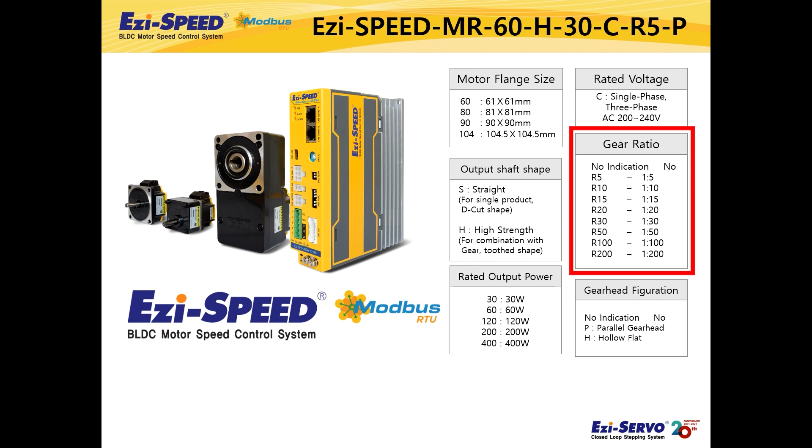The output corresponds to the motor size in ascending order. That is, a 61 mm sized motor corresponds to 30 watt, an 81 mm sized motor corresponds to 60 watt, a 90 mm sized motor corresponds to 120 watt, and a 104.5 mm sized motor corresponds to 200 watt and 400 watt. The gearbox can be selected between a parallel shaft gearbox and a hollow shaft flat type gearbox, and the gear ratio can also be selected as shown in the table.

Now, we will introduce the features of Ezi-SPEED Modbus-RTU products. Ezi-SPEED Modbus-RTU product is a BLDC motor speed control system that supports Modbus-RTU network based on RS-485 communication. The Modbus protocol has a simple structure and open specifications, so it is a network used in overall industrial fields such as logistics and manufacturing.

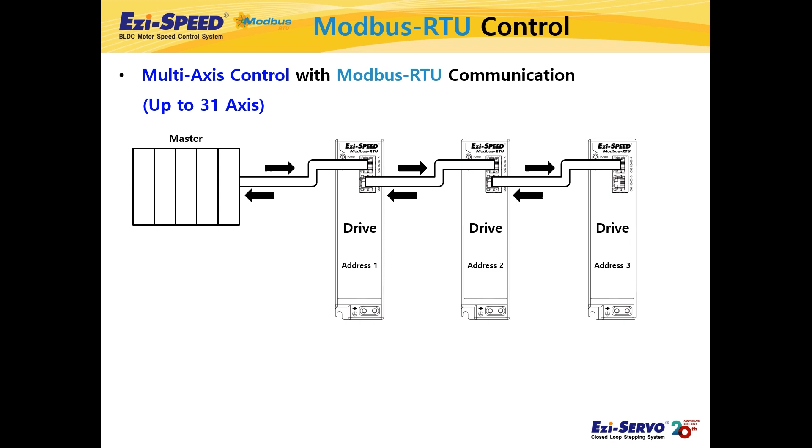Up to 31 drives can be connected to one master controller. The master controller can send commands to each drive independently, one at a time, or send commands to multiple drives simultaneously through broadcast or group commands. As an example, I will show a demo connecting two drives using the HMI as the master.

As you can see, each drive can be controlled independently from the master. Ezi-SPEED Modbus-RTU provides a group operation function, allowing you to control two drives simultaneously.

Additionally, Ezi-SPEED Modbus-RTU provides a control interface that connects Modbus-RTU network control, I/O control, and PC support software via USB. First, I/O control can be connected to an external switch or PLC through an I/O input-output cable to configure an operation system through I/O. By setting the necessary functions for input and output, the user can drive with functions such as up to 16 speed operation, emergency stop, and torque limit. It also provides the ability to set the speed using analog.

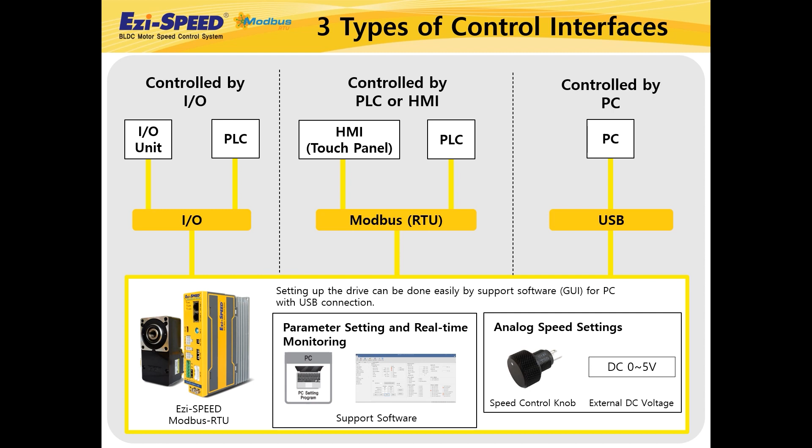Next is network control using the RS-485-based Modbus-RTU protocol. You can control the drive by connecting a master such as a PLC or HMI that supports Modbus-RTU. Up to 31 drivers can be connected to one master. Each axis can be operated separately, and multiple axes can be operated simultaneously through group control. Support software for PC is provided, allowing you to quickly and easily set various drive parameters or test operation.

Let us introduce I/O control in more detail. Ezi-SPEED Modbus-RTU supports 7 inputs and 2 outputs and can also be controlled analogously through a variable resistor or external voltage. Ezi-SPEED Modbus-RTU allows users to set various functions to 7 input and 2 output signals. It is possible to control the motor's start, stop, rotation direction change, torque limit release, and multi-speed operation.

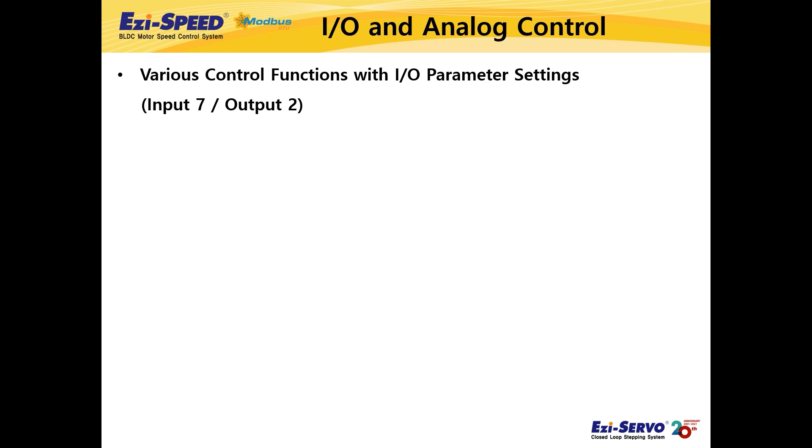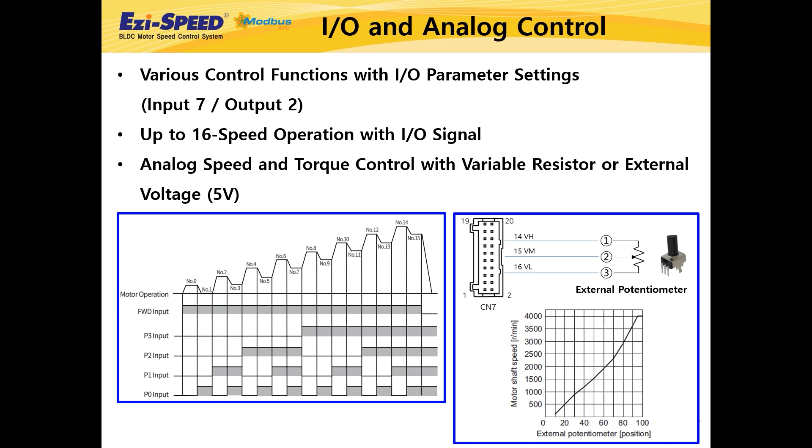It provides 16 types of operation data consisting of rotation speed, torque, acceleration time, and deceleration time, and operation at up to 16 speeds is possible. Parameters and operation data can be easily set through PC support software. Continuous analog speed control or torque control is possible through variable resistor or external voltage. Offset and maximum values can be set and precision can be adjusted through parameters.

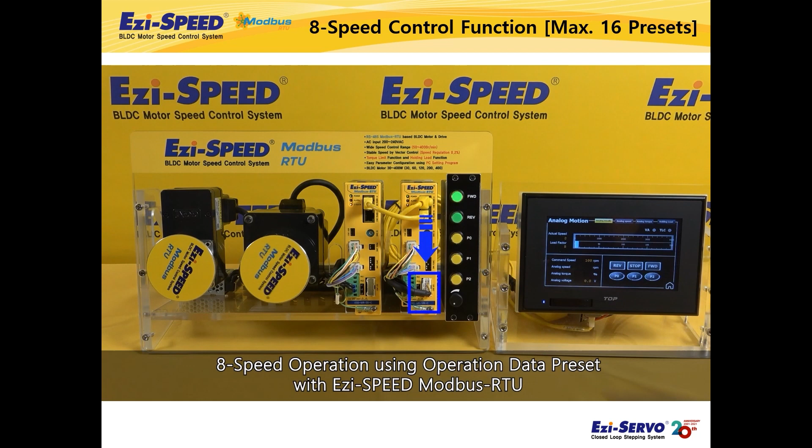As an example of the I/O control function, I will show a demo of 8-speed control using a switch as I/O. The 3 yellow switches are connected to functions P0, P1, and P2 respectively. You can select 8 operation data with on-off combination. When using up to P3, up to 16 operation data can be selected.

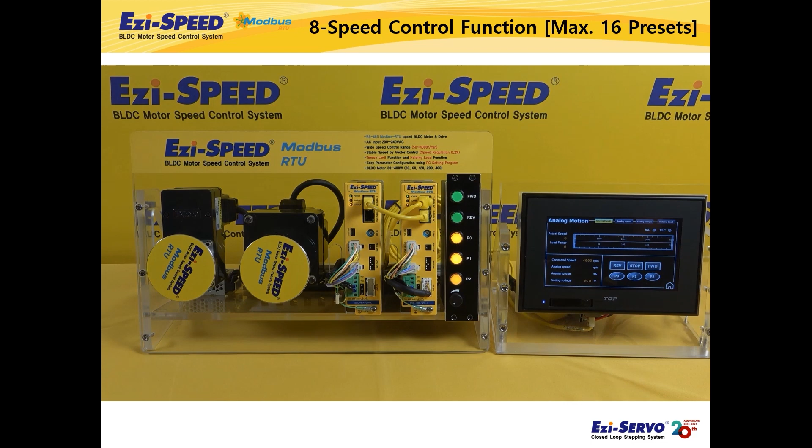The currently set operating data are 100, 500, 1000, 1500, 2000, 2500, 3000, and 4000 revolutions per minute in that order. You can also control the speed of the motor via analog input with the volume knob.

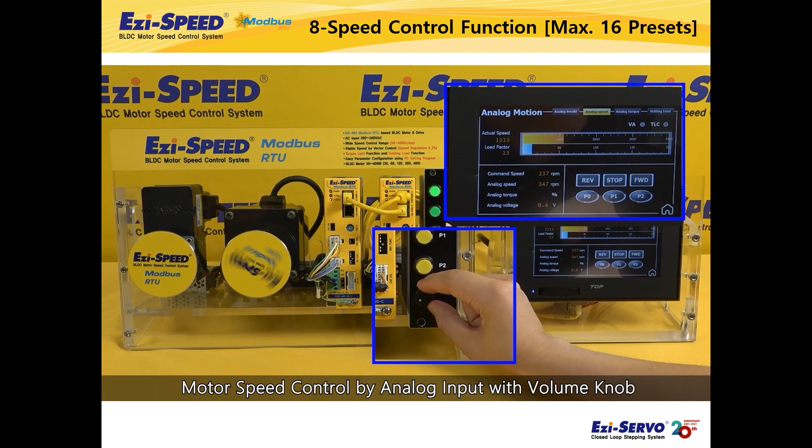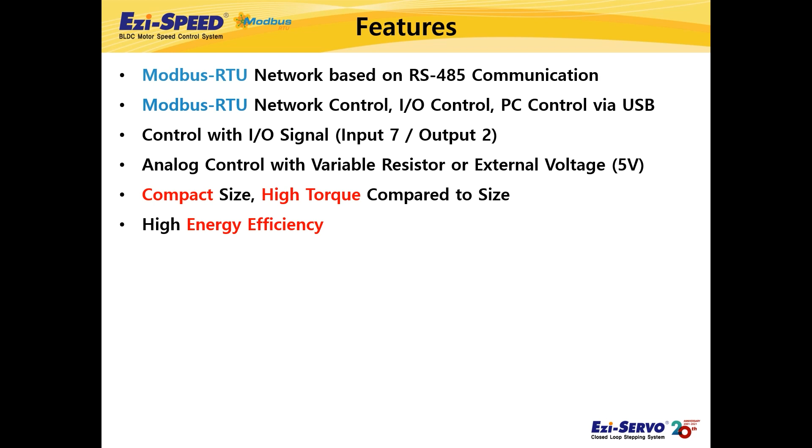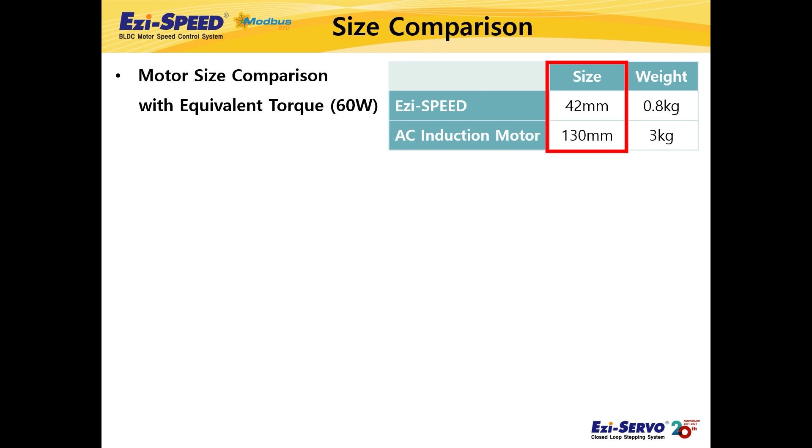An Ezi-SPEED Modbus-RTU has a compact size and high torque by adopting a small, high-efficiency brushless motor. For example, when compared with the same output, the 60-watt standard size of the Ezi-SPEED is compact at 42 mm. AC induction motors are relatively large at 130 mm. Ezi-SPEED weighs only 0.8 kg and the AC induction motor weighs 3 kg, making the Ezi-SPEED lightweight.

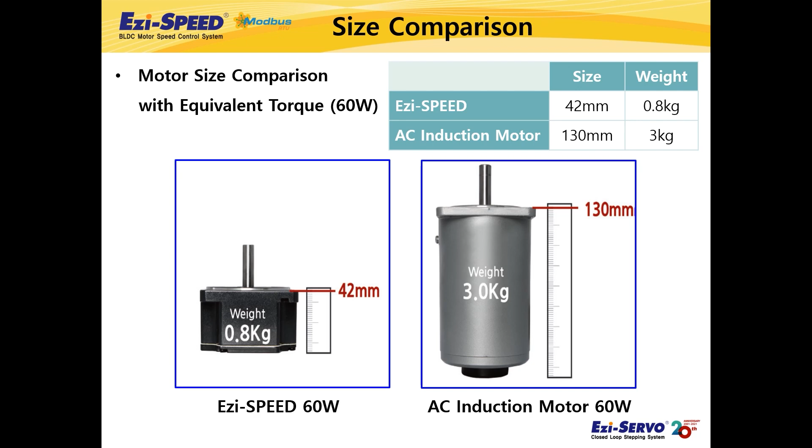And since AC induction motors often have a fan mounted behind the motor, the size difference is almost 3 times that of Ezi-SPEED motor. Therefore, using Ezi-SPEED, machine size will be much smaller. Additionally, Ezi-SPEED can produce higher torque than AC induction motors despite its compact motor size. In particular, in the case of AC induction motors, torque drops at low speeds, while Ezi-SPEED consistently produces high torque at both low and high speeds due to the characteristics of BLDC motors. I will explain it with a torque graph later on.

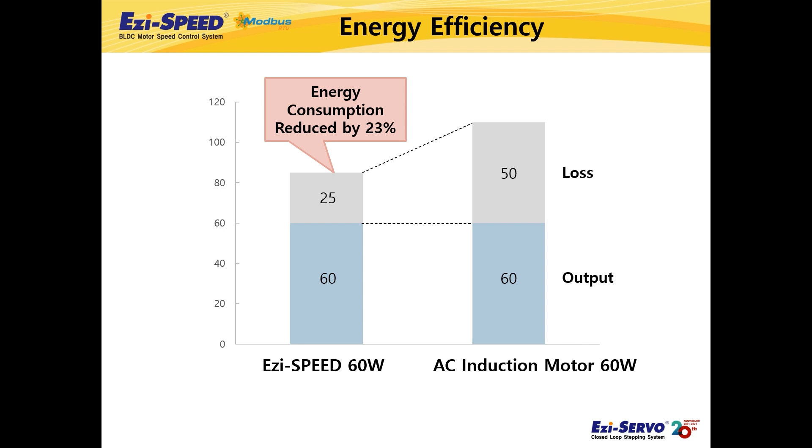Additionally, BLDC motors have high energy efficiency by using permanent magnets to suppress secondary losses in the rotor. When replacing the AC induction motor with the Ezi-SPEED series, it is possible to reduce power consumption by approximately 23%. Next, Ezi-SPEED Modbus-RTU products can control a wide range of speeds. In addition, it has high speed stability by controlling the motor with vector control technique. Let me explain it with a graph.

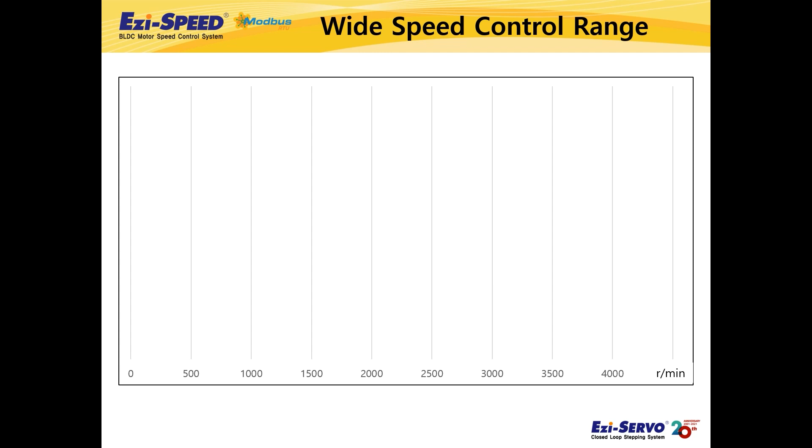Ezi-SPEED can be controlled from a minimum of 50 revolutions per minute to a maximum of 4000 revolutions per minute, and consistently produces high torque from low to high speeds. However, in the case of the combination of an AC induction motor and inverter, although there are differences depending on the manufacturer, in general, the speed can only be achieved from a minimum of 200 revolutions per minute to a maximum of 2400 revolutions per minute, making it impossible to control at high speeds like Ezi-SPEED. And the torque is reduced at the low speeds.

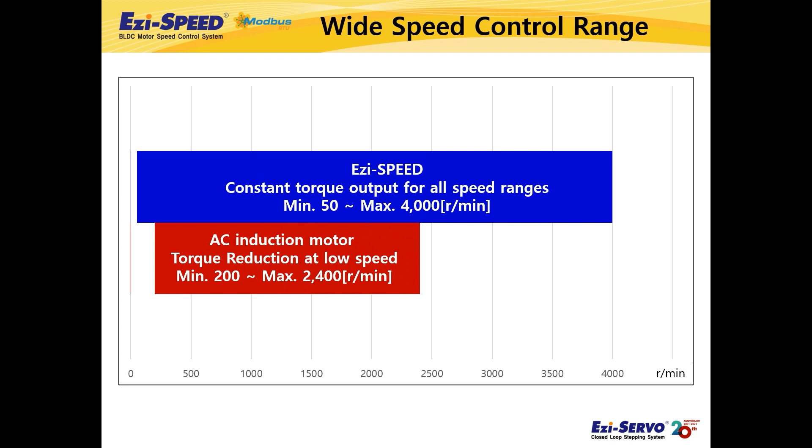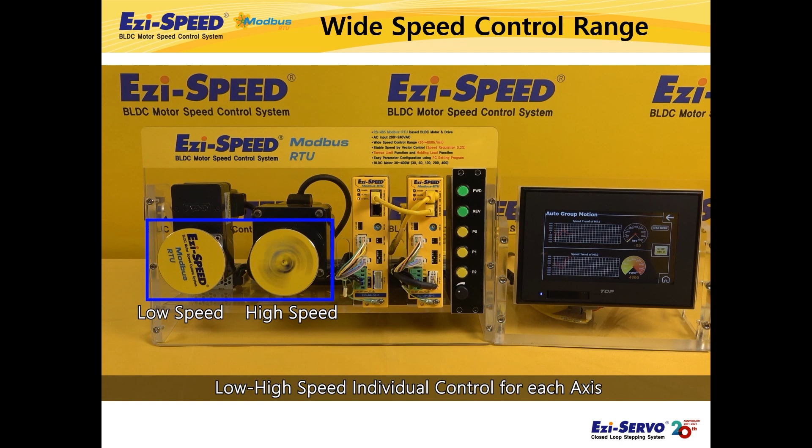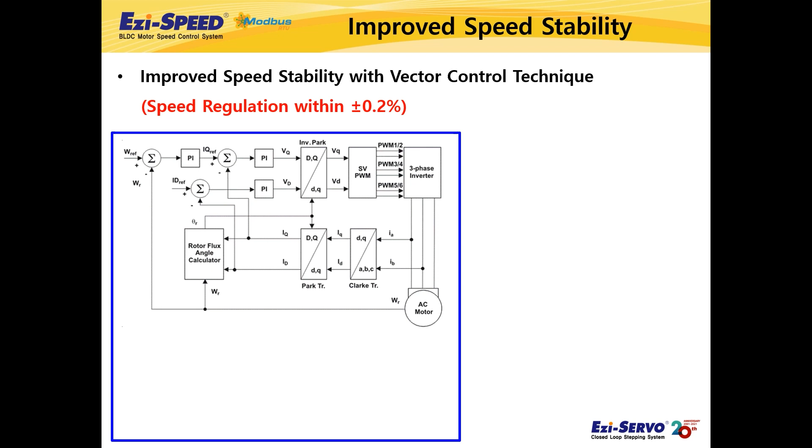Ezi-SPEED Modbus-RTU controls the motor through vector control technique to achieve high speed stability. The vector control technique is called field-oriented control and is a method of controlling the rotation of the magnetic field vector by the stator with current. Because the size and direction of the magnetic field can be precisely controlled, the motor's torque and speed stability are higher than with existing control methods. Ezi-SPEED Modbus-RTU has high speed stability with a speed fluctuation rate within 0.2%. And Ezi-SPEED Modbus-RTU provides torque limit function and load holding function. We will briefly explain each function in the next chapter.

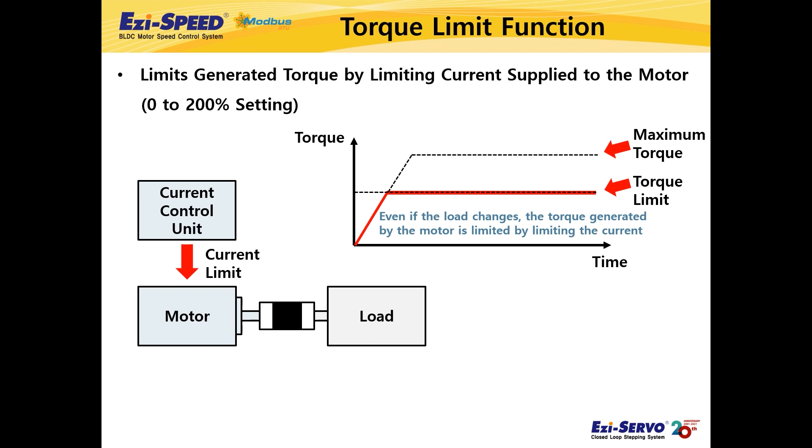First is the torque limit function. This function suppresses the torque generated by the motor so that it does not exceed the value desired by the user by limiting the current flowing through the motor. The setting value of 100% is the rated torque, and the torque limit can be set from 0 to 200%. This prevents applying more force than necessary. For example, you can set the torque limit slightly higher than the torque required for the applied load to prevent operator injury from excessive motor torque. This function can be applied to AGVs, conveyors, agitators, etc. where speed control systems are used.

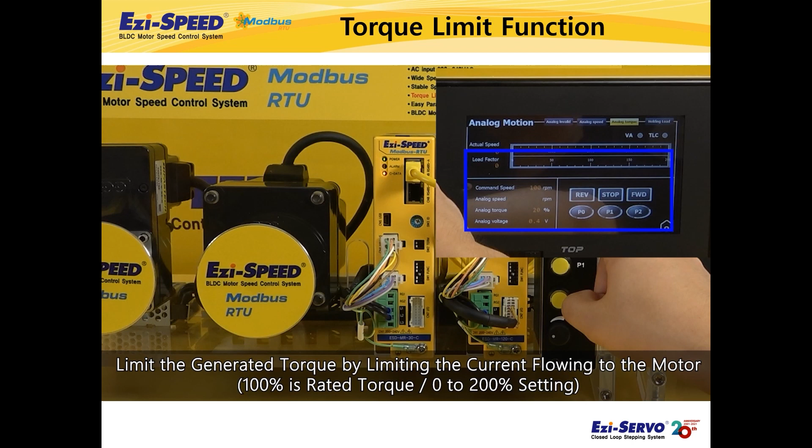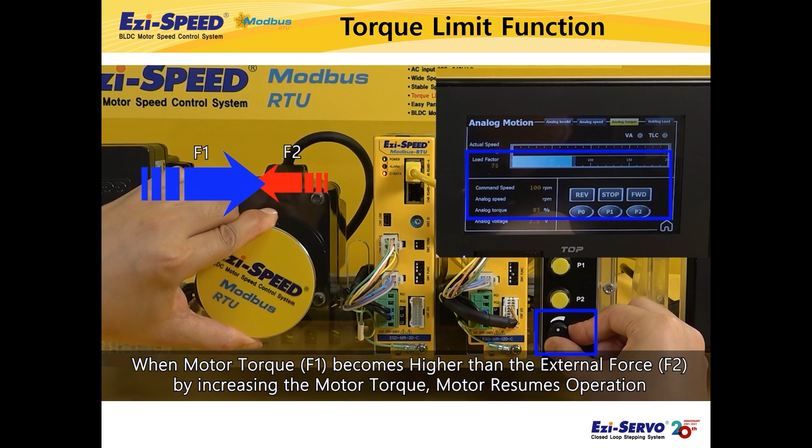The torque limit function can also be set using analog input. We will demonstrate how to adjust the torque limit value using the volume knob. The torque limit function is a function that limits the current flowing in the motor to prevent the motor torque from exceeding the torque limit value. Therefore, if an external force exceeding the torque limit value is applied, the motor torque cannot exceed this and the motor cannot operate. At this time, if the torque limit value is higher than the external force, the motor torque exceeds the external force and the motor runs again.

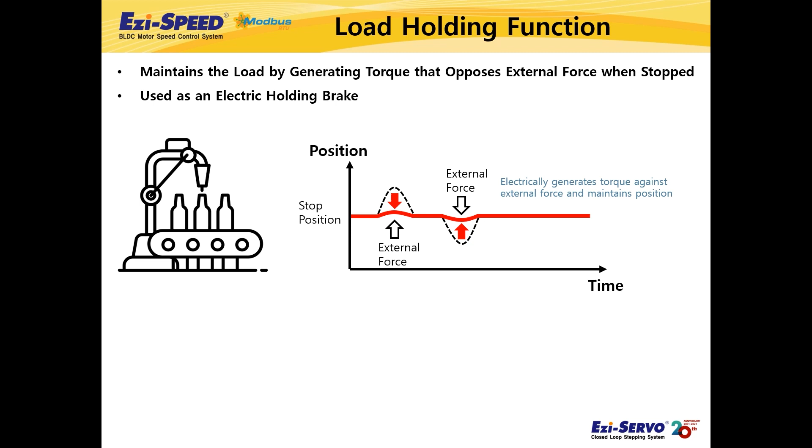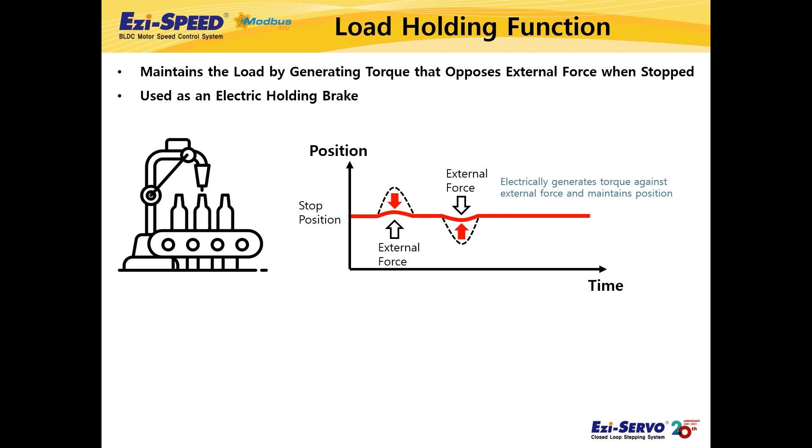Next is the load holding function. This function maintains the current position through an appropriate force even when stopped. When an external force is applied when stopped, the position is maintained by generating an appropriate torque. It can be used as an electric holding brake when the motor is at standstill, even without a mechanical brake. For example, when working on a belt while the conveyor is stopped frequently, the load holding function can be used to prevent the workpieces from shaking.

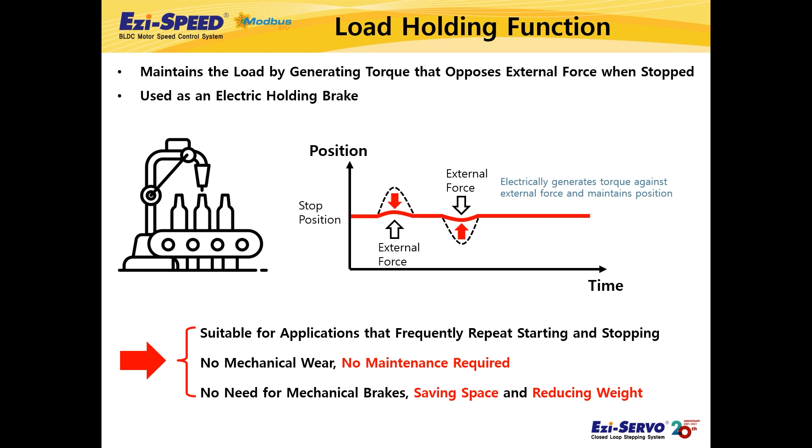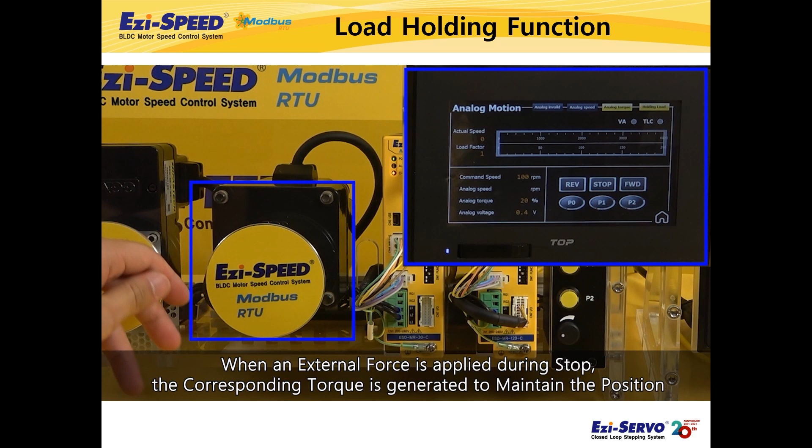Unlike mechanical brakes, maintenance is not required as there are no mechanical wear parts, and space is saved and weight is reduced. Next, we will demonstrate the load holding feature with the demo kit. When an external force is applied to a standstill motor, you can see that the motor maintains its position by generating opposing torque. It can act as an electrical holding brake without a mechanical brake.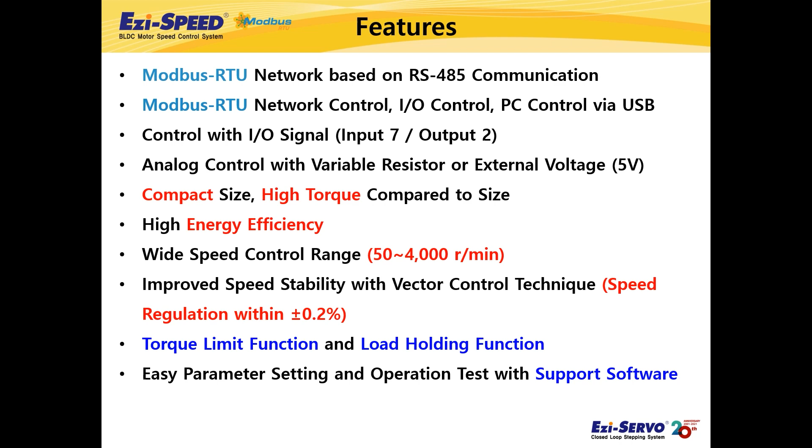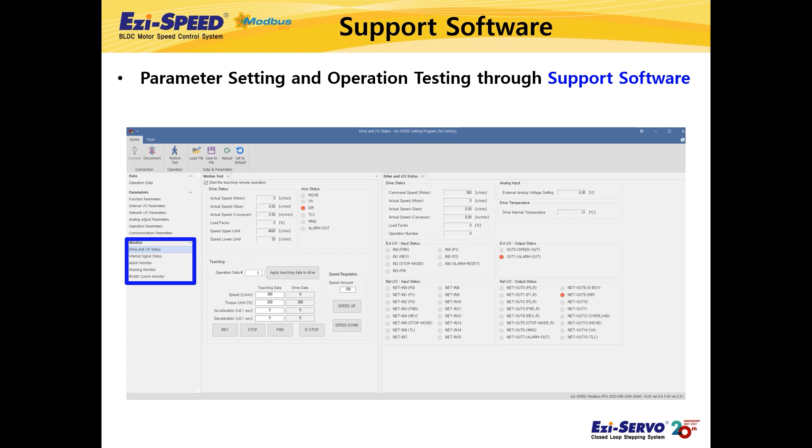Lastly, you can easily set product parameters and test operation with the support software provided by FASTECH. The drive and PC can be simply connected via USB port. The support software provided by FASTECH supports various functions. There are parameter setting function, monitor function, and operation test function. We will explain each function with a demo kit.

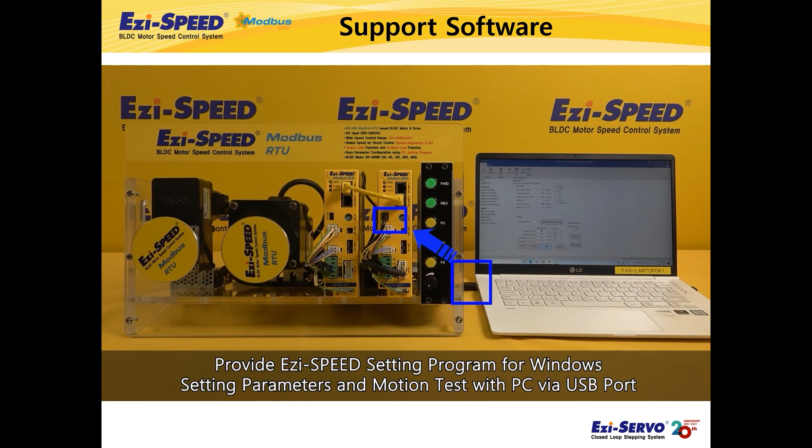As you can see, you can connect the drive's USB port to your PC using a USB 2.0 mini Type B cable. With the support software, you can easily set all parameters. Additionally, the monitor function allows you to check the internal status of the drive and motor, alarms, and other status at a glance. Lastly, the motion test function allows you to easily test whether the motor and drive are operating normally.

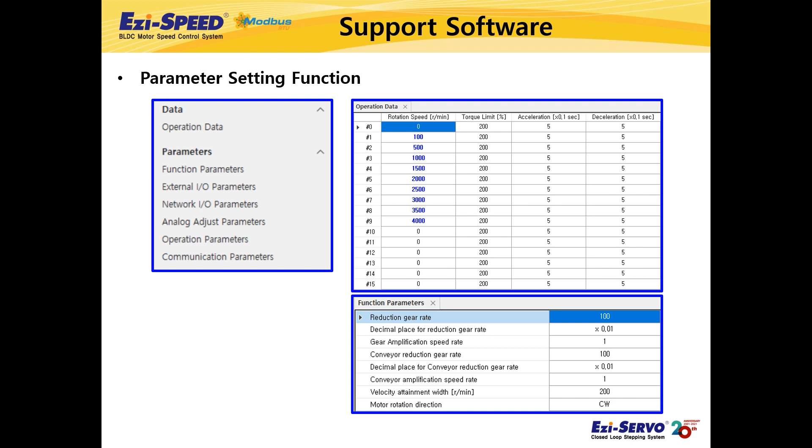First, with the parameter setting function, you can easily modify and save parameters for motor operation or various functions. In addition to 16 operation data including rotation speed, torque limit, acceleration time, and deceleration time, all parameters can be set easily and quickly with the support software. The set values can be saved as a parameter file so that the settings can be quickly copied to multiple drives. The following shows an example of setting operation data in the support software.

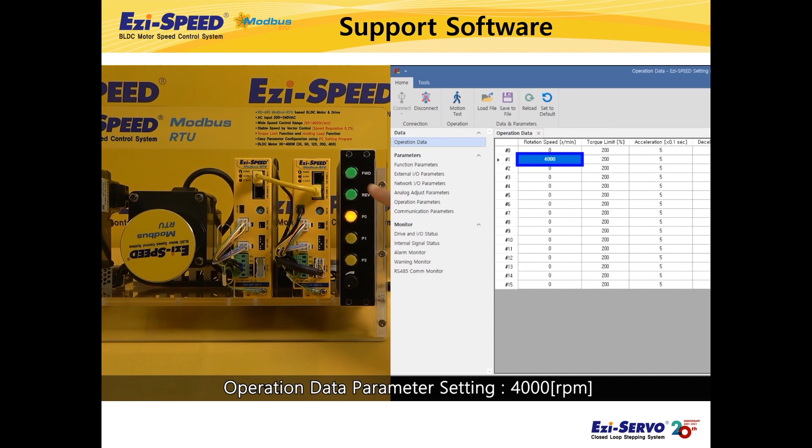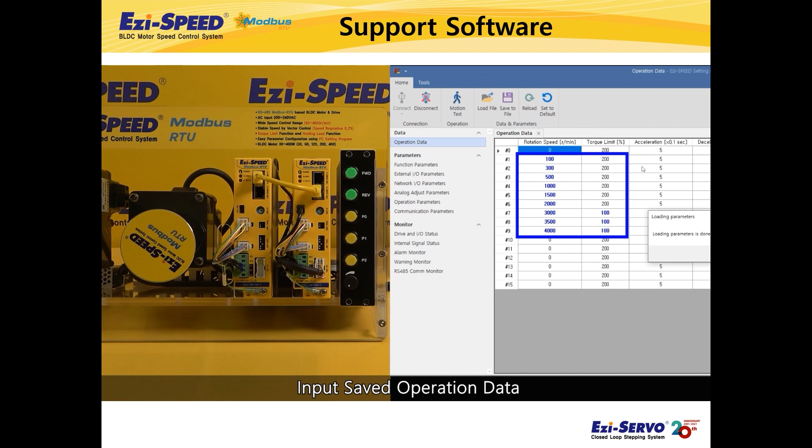You can also load saved parameter files and set operating data at once. All parameters can be modified in the support software, including function setting parameters, external I/O parameters, network I/O parameters, analog adjustment parameters, operation setting parameters, and communication parameters.

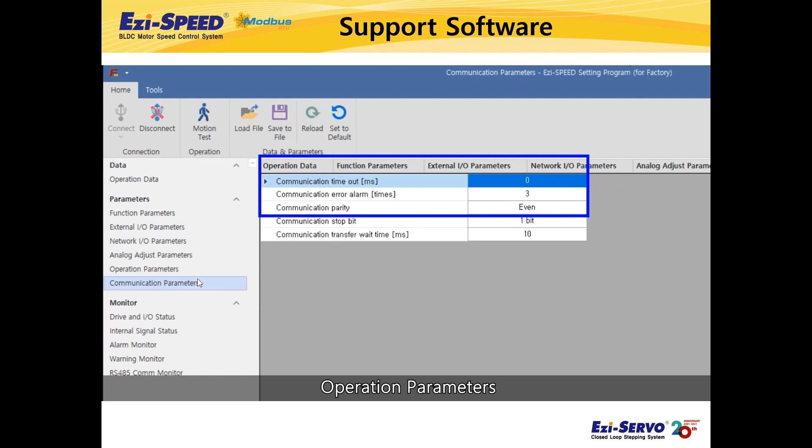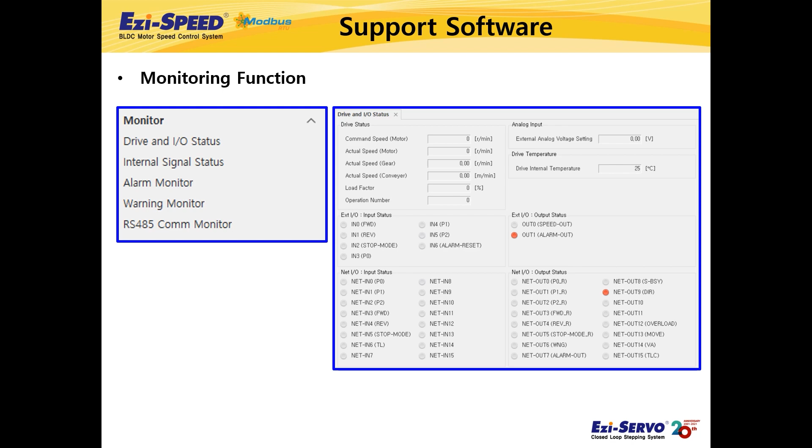Additionally, the monitor function allows you to monitor the status of drives, motors, and external I/O in real time. You can easily check the current rotation speed, load rate, input signal, alarm history, etc. The following is an example of the monitoring function during I/O control. As you can see, you can monitor command speed, actual speed, load rate, etc. in real time.

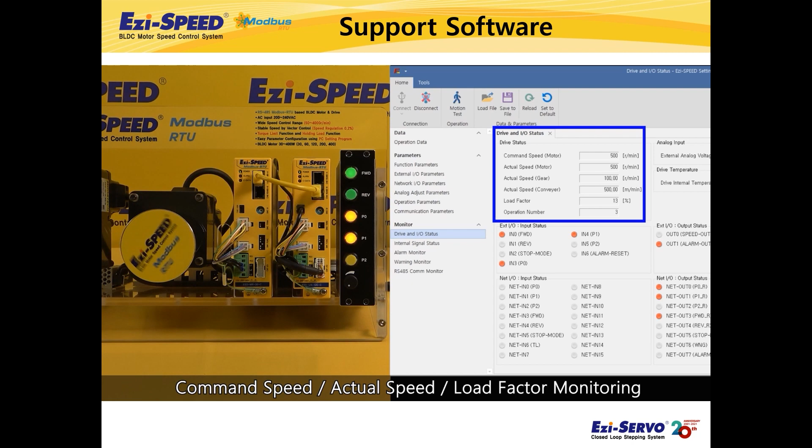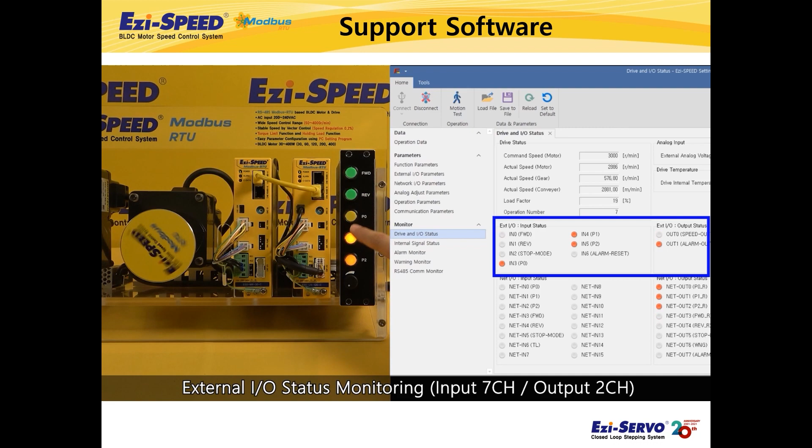Additionally, the status of I/O switches can also be monitored on a PC in real time. Also, you can monitor alarms, warnings, and communication errors, and check alarm records along with causes and actions.

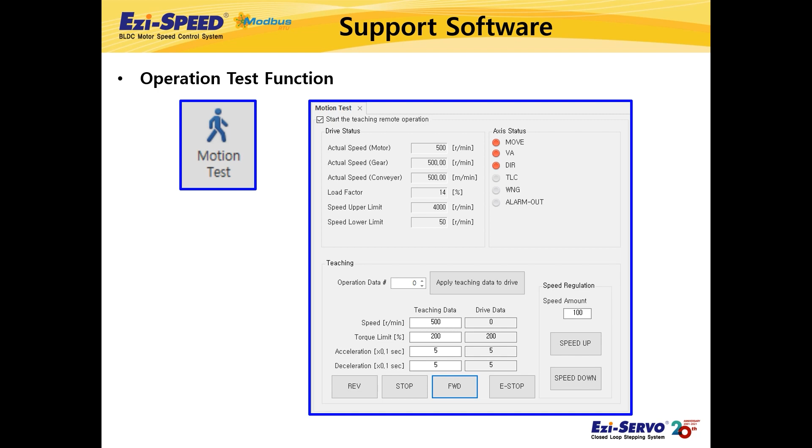Additionally, it provides a motion test function so you can simply drive the motor. It also provides a teaching function that applies motion data to operation data, so you can test it and set the operation data right away. We will demonstrate the motion test function of the support software by controlling a motor. The motion test function allows you to check whether the motor operates normally through a PC without a separate external I/O device or network master. As you can see, motor operation tests such as speed control, direction change, and sudden stop are possible.

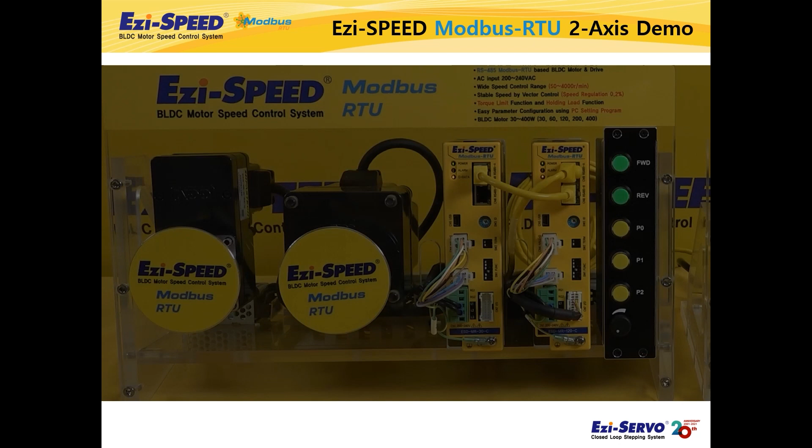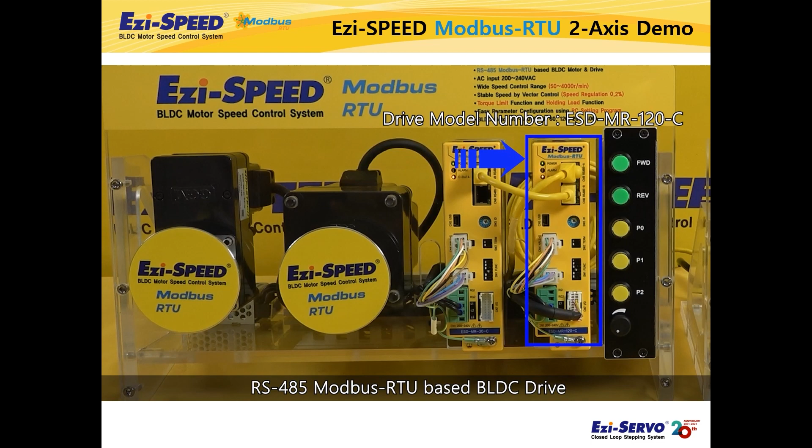Lastly, we will show a demo kit of the Ezi-SPEED Modbus-RTU product. The products and specifications used are as follows. A BLDC speed control drive based on RS-485 Modbus-RTU was used, and these are the drives for 30 Watt and 120 Watt, respectively. Additionally, the motors corresponding to each drive have a hollow shaft flat gearbox and a parallel shaft gearbox.

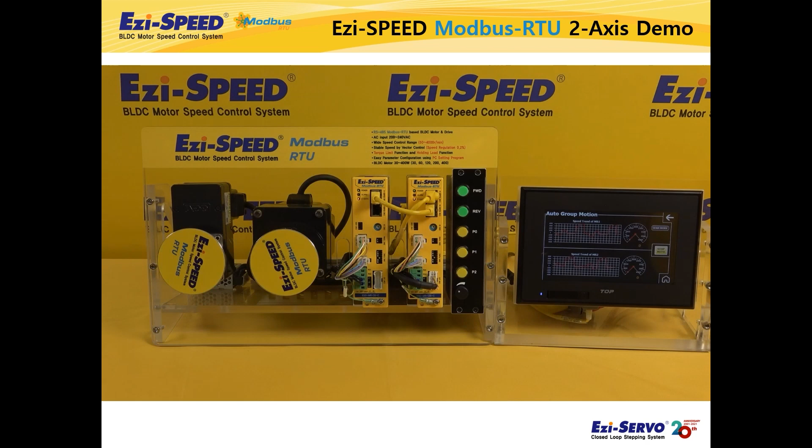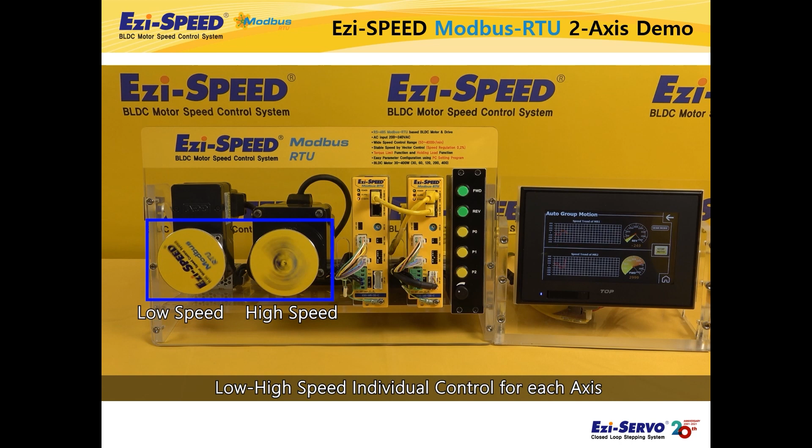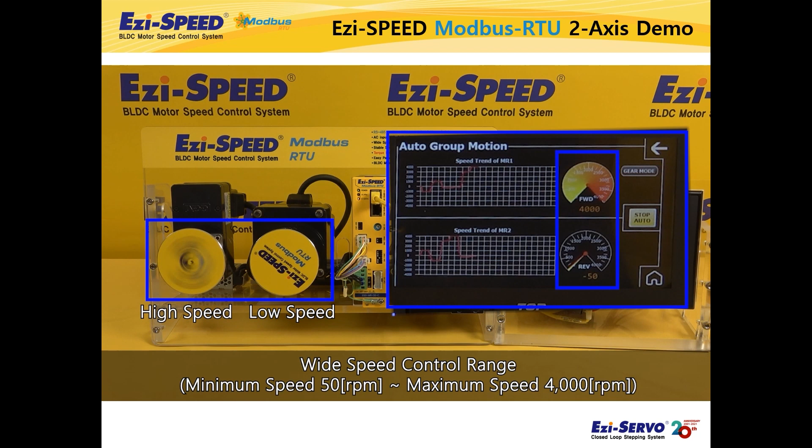The HMI and 2 drives are connected via daisy chain RS-485 cable, and up to 31 drives can be connected and used. Using HMI as a Modbus-RTU master, you can control multiple axes drives through network communication. Additionally, the motor used is a BLDC motor and can be controlled over a wide speed range from a minimum speed of 50 revolutions per minute to a maximum speed of 4,000 revolutions per minute. 2 connected motors can be controlled independently through network communication, or they can be controlled simultaneously by setting up a group.

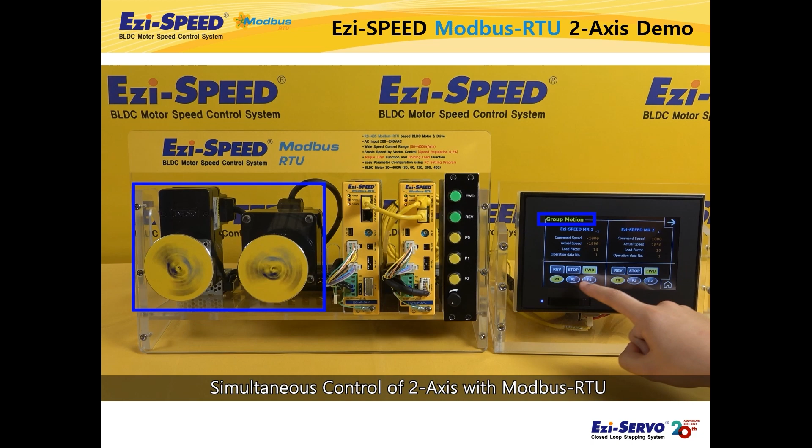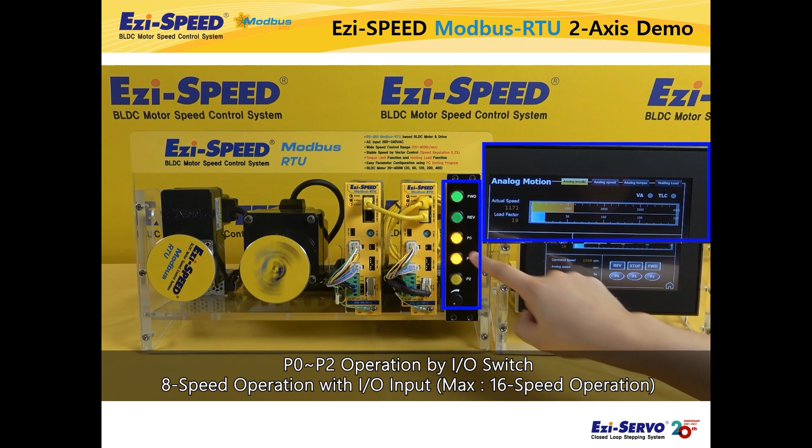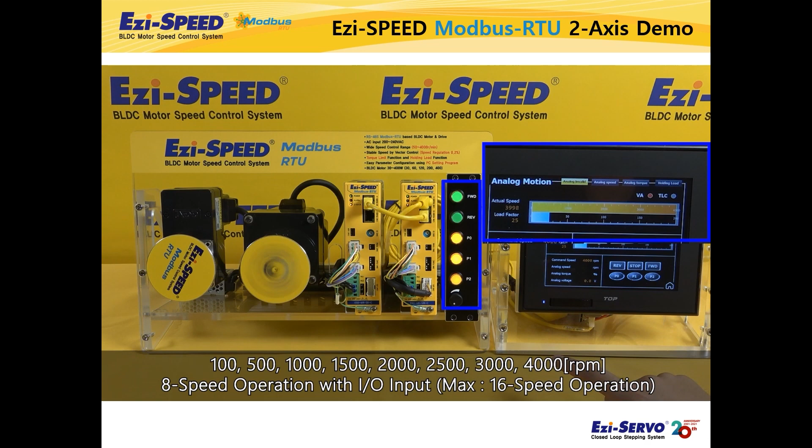The motor can also be controlled through an externally attached I/O switch, which shows 8-speed operation by combining P0, P1, and P2 set to the 3 yellow switches. The speed value of the operation data can also be controlled continuously in analog form through the volume knob.

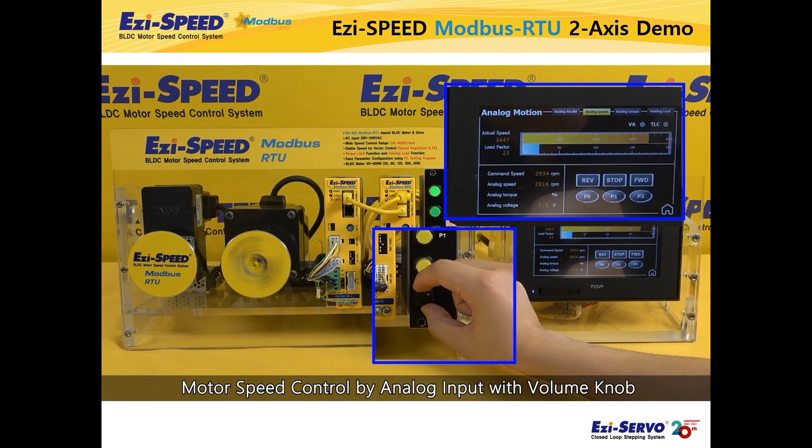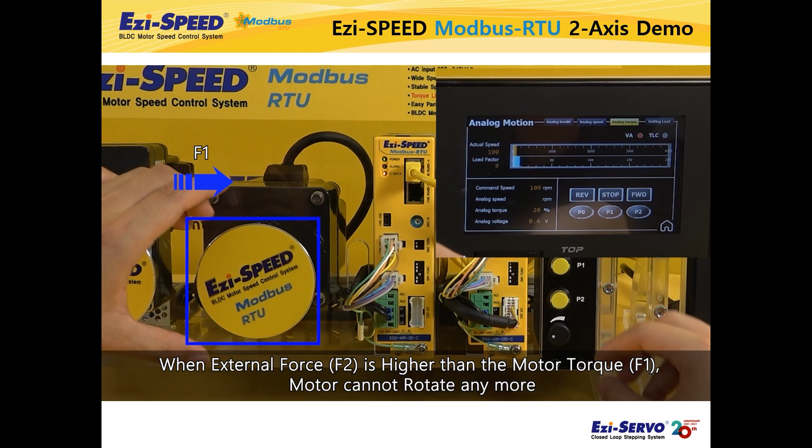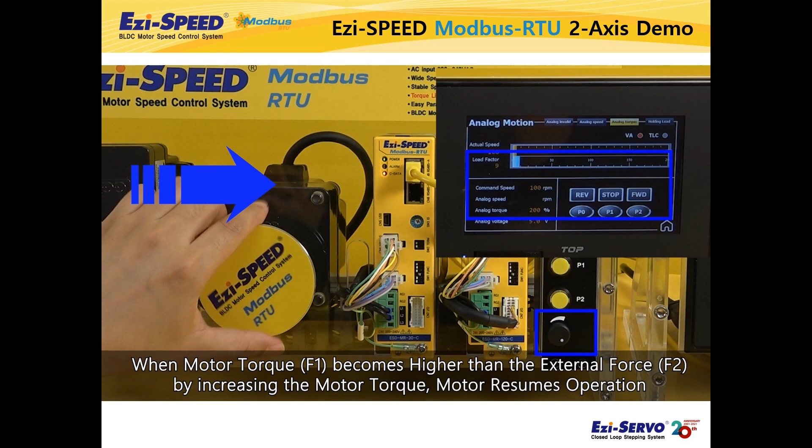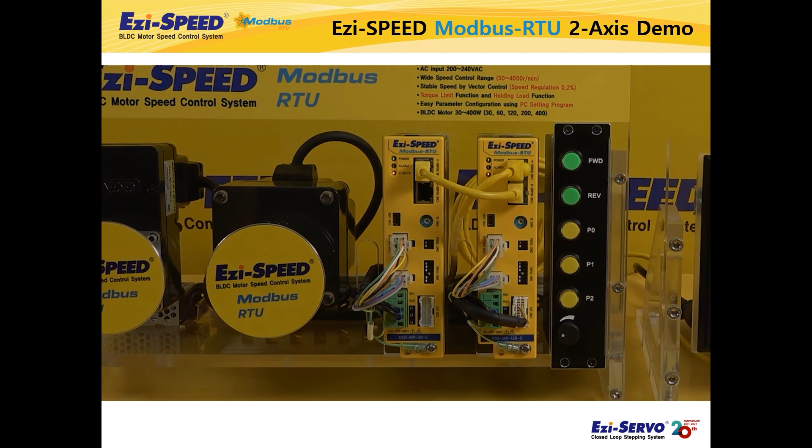The torque limit value of the operation data can also be controlled analogously through the volume knob, and the correlation between external force and torque limit value can be checked through the following operation. Ezi-SPEED Modbus-RTU provides a load holding function, allowing it to maintain its position even when stopped using electrical power. This concludes the product introduction of Ezi-SPEED Modbus-RTU, a Modbus-RTU based BLDC speed control system.